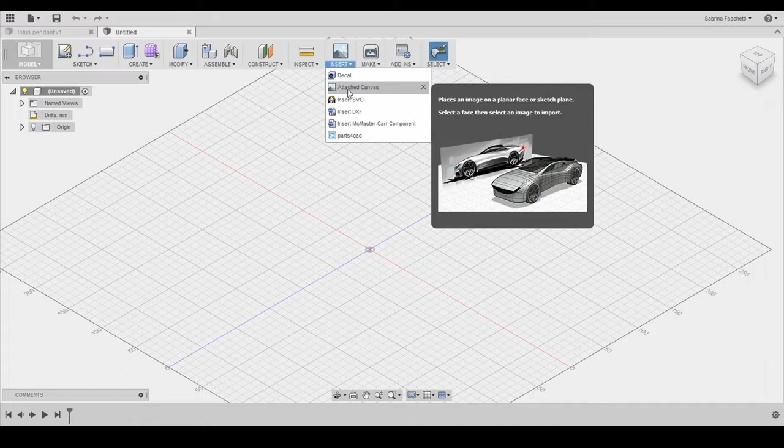Here we are in the workspace of Autodesk Fusion 360. The first step is to import the image of the flower. To do it, we select Insert in our menu and choose Attached Canvas. We select the top plane and import the image.

To resize the image and make it the right size for a pendant, we need to select the image in Canvases in our left side menu. We select Calibrate, select the two corners of the image, and type the size we want in the dimension box. I'm making mine 50mm by 25, which is about 2 inches by 1.

Now we are ready to start creating the elements of our pendant. We will create each petal separately using the spline tool and join them.

We create a new sketch on the top plane, and using the spline tool, we recreate the shape of the central part of the flower. The spline tool works with multiple points that help to build up a complex curve.

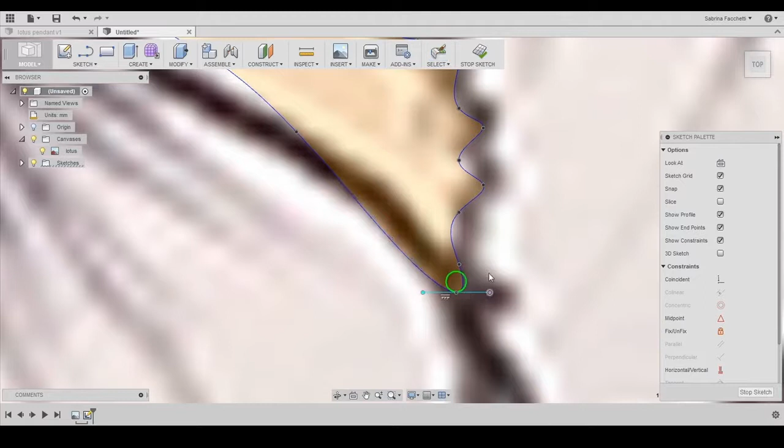Each point we create can be edited and adjusted using the green handles. Dragging the handles, we can change the diameter of the curvature of the point, and rotating them, we can modify the orientation. So using this method, we fix our shape to match the picture on our canvas.

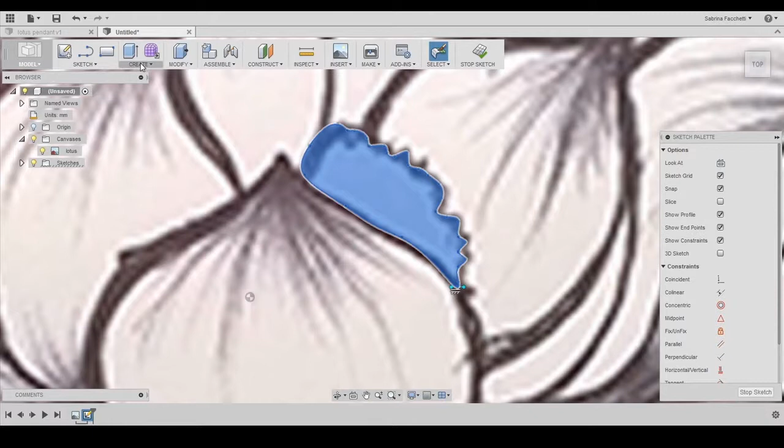The fewer points you use, the better, because your shape will be more organic and easier to adjust. Once the shape is fixed, we add thickness by using the extrusion tool, setting the distance at 2mm, which is a good size for this pendant to be printed but not too heavy or bulky.

We repeat the operation we just did on the top plane to create the first petal shape, paying attention to join the new sketch with the already existing extrusion.

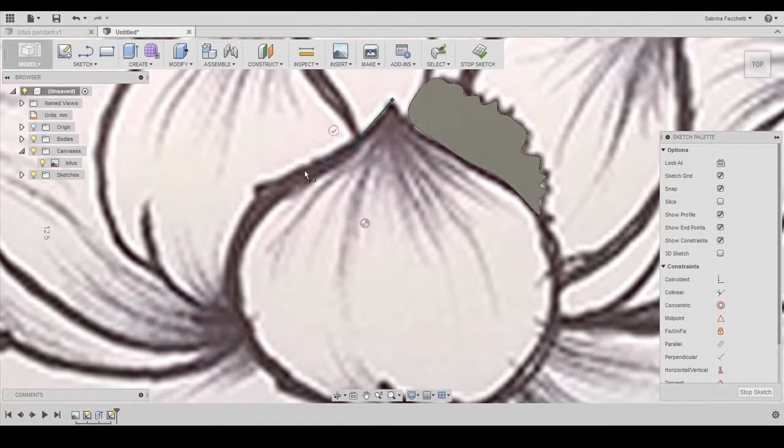We fix the shape like we did before, moving the points and using the handles until we are satisfied with the result. Then we create a 1mm offset of our spline using the offset tool.

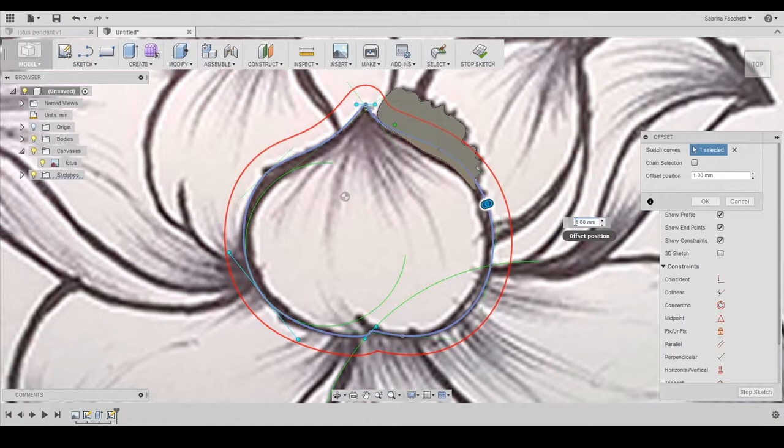This will create a 1mm thick wall of the shape you just created. By default, it is set outwards, but we can easily invert the direction by adding a minus before the number.

We can go now to the Create section and extrude the part in between the two sketches using the same settings we used for the central part of the flower. Pay attention to set the Operation to Join to be sure to obtain a single body.

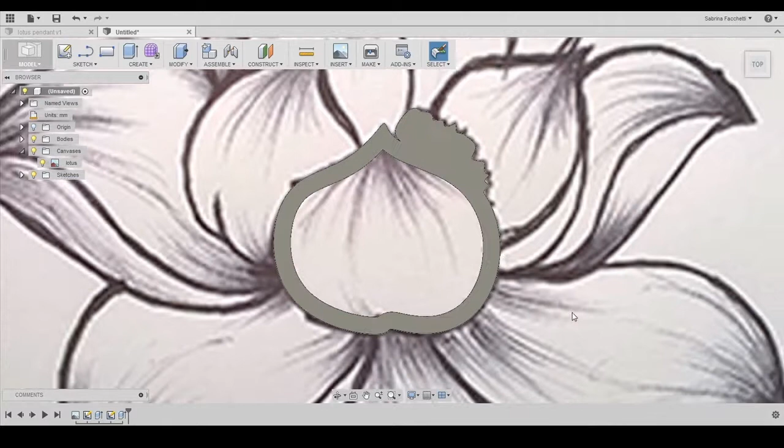We repeat all the operations we did before to create the next petal, with the only difference that this time we don't close the spline, because we will do it afterwards once we've created the offset.

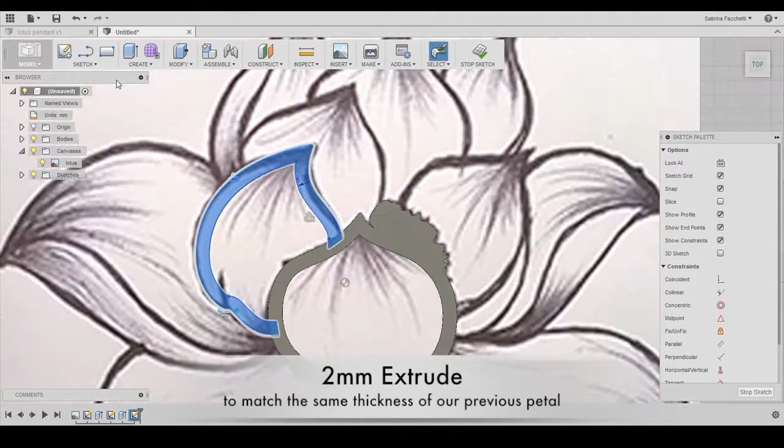Now that we have a closed shape, we can extrude the second petal with the same settings we used before, paying attention once again to set the operation to join. Repeat all these operations until you create all the petals of the lotus.

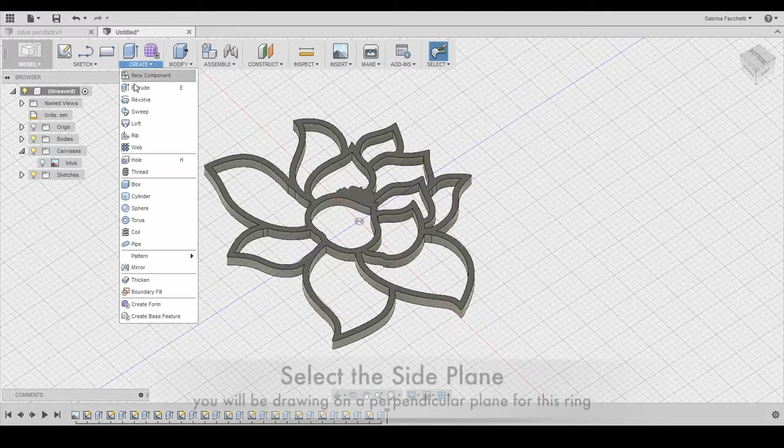Once the lotus shape is all created, we only need to add a small ring on top to insert the chain. To make it, we can use a very useful tool, the torus tool.

We create the torus shape or ring shape on the side plane, with 3mm of diameter and 1mm of section. This time we set the operation to New Body so we can move and put it in the correct position.

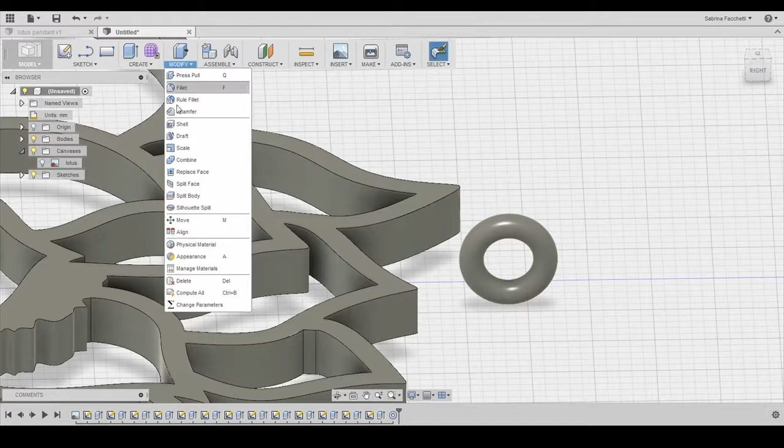Pay attention, make sure that the ring or torus intersects the main lotus shape. And here we are, our lotus pendant is done.

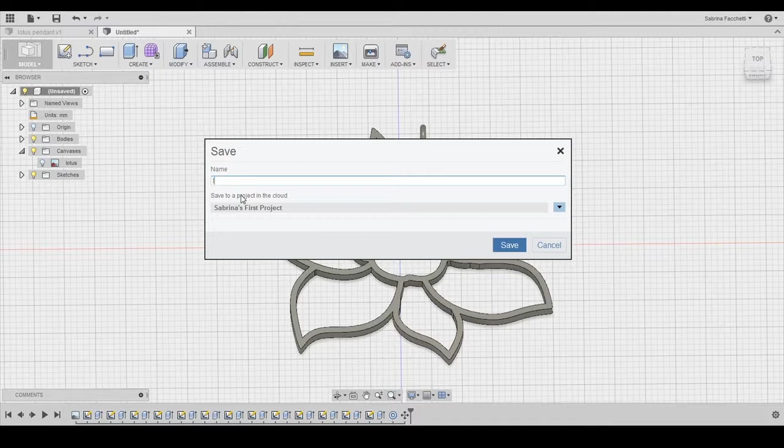The final step consists in saving our project on Autodesk Fusion Cloud. Once saved, we can export the file in STL for 3D printing.

To export the file in STL, we need to select the object, click on the name we gave it. Once selected, right-click on your mouse, or hold down Ctrl plus click on Mac, to bring up your secondary menu and choose Save as STL.

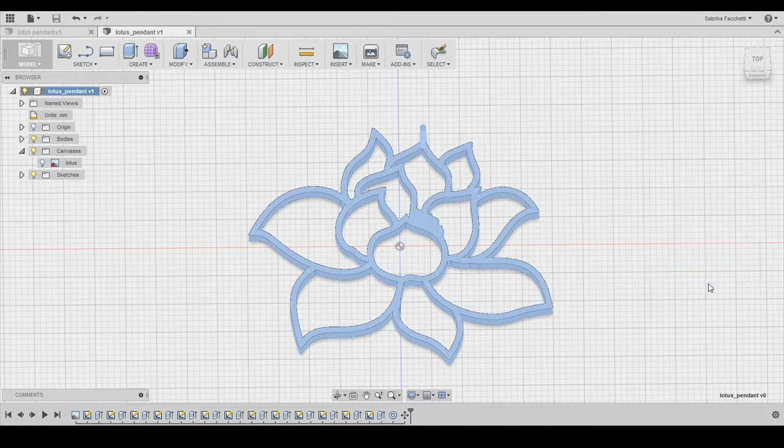Congratulations! Your Lotus Pendant is done. Now that you know how to use the spline tool, you can create whatever you want.